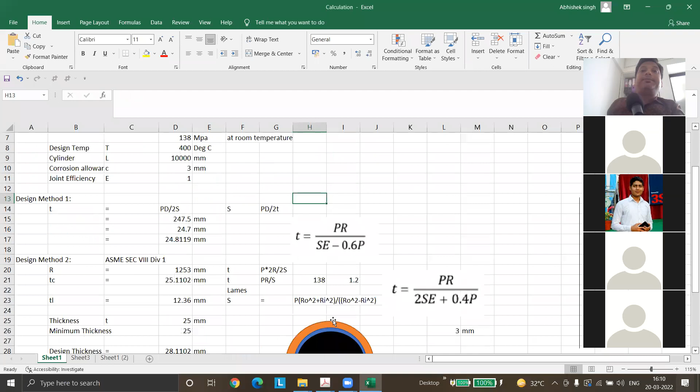Okay, this is the calculation we had last time. So if we want to draw that, consider this as a sphere. It will be along this line. And in this line also, if we see it from another view, it will all be the same.

So there's only one type of stress, but the stress generated in a spherical shell is only half the magnitude of the circumferential stress generated in a cylinder. And that is the reason if we design the vessel in a spherical shell form, we get the thickness as only half of what we have to give for a cylindrical one. Does that make sense, guys? Yes, sir.

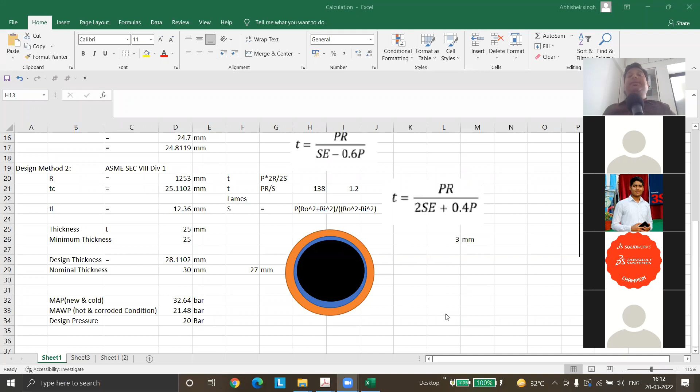Great. So now you might be thinking, then why not always go for a spherical shell rather than a cylindrical one? What do you think, which type of vessel is generally used, cylindrical or spherical? If you've visited any plant, what type have you seen? Cylindrical. So why is that, when designing, you find cylindrical more economical even though the thickness for spherical is almost half?

Then why don't we go for spherical? Construction is simpler in case of cylindrical. Correct. And who responded? Arshad, Harsha? Very good.

Exactly the right point, because the construction of a spherical shell is really challenging. It's really difficult, and then for support you have to provide a leg kind of support, which is also only a point support. So it becomes critical, and that is the reason it's less in use.

But still, if you have a very high pressurized fluid, like LPG storage, it has to be stored at very high pressure. So for very high pressure components, it still makes sense to provide a spherical shell. So many times you will see that. Once you see a spherical shell, you should remember that the pressure is definitely going to be higher in that.

That is the reason they might have gone with spherical shell. And whatever cost you save in material, that is a huge cost, sometimes more than the construction cost. So finally that economics works out in favor of the spherical shell.

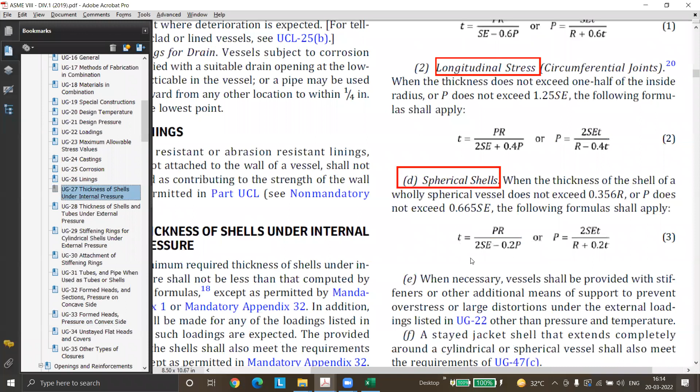Last time we calculated circumferential stress for a cylindrical shell. So this we did, and this was given to you as homework. Very simple formula - if you calculate, do you want to do it now?

You guys want to do it now if you have not done it? You want to calculate the thickness, or should we go to the next section? Whatever you say. No sir, please calculate it. You want to calculate it?

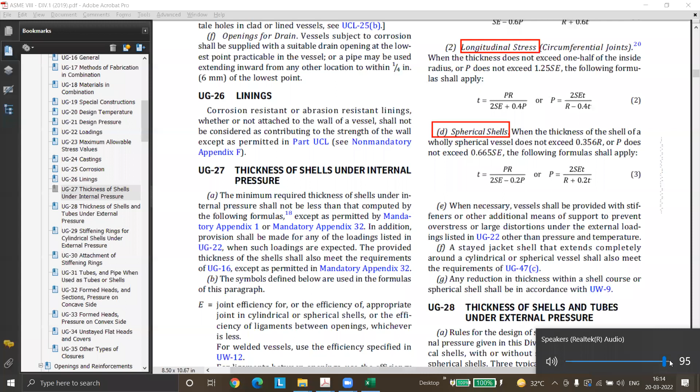Okay, let us calculate. It's better to spend 5 minutes, because once you calculate it, it will start making more sense to you. So you have to do it at least one time. Try to do it. Let us do that, let us try to calculate.

So what we'll do is copy paste the formula here. I'll just take a snapshot of it, we'll paste it here. So now what we are going to do is calculate the thickness for a spherical shell.

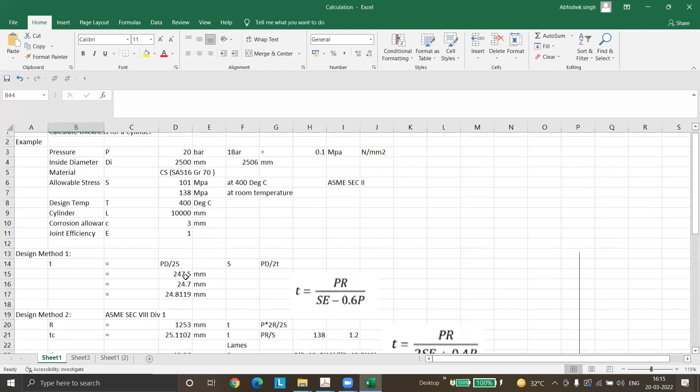Because if in operation they feel 20 bar pressure is going to be there, they will give you 1.2 times, 1.3 times higher pressure, because in the process sometimes it also needs some tolerance, so they want to keep it higher. We don't want to exceed the design pressure. So your question is very valid.

So if nothing has been said to you and it's given as a pressure like 20 bar, first of all you need to ask whether it's 20 bar in absolute or in gauge terms. You should ask that - if it is in gauge terms, that means the external pressure has already been subtracted.

Making sense? If sir gives this input in absolute terms, then you will be designing your pressure vessel for 19 bar - 20 minus 1, which is there for the external pressure trying to oppose it, which is always going to be there. So 20 minus 1, we have to design only for 19.

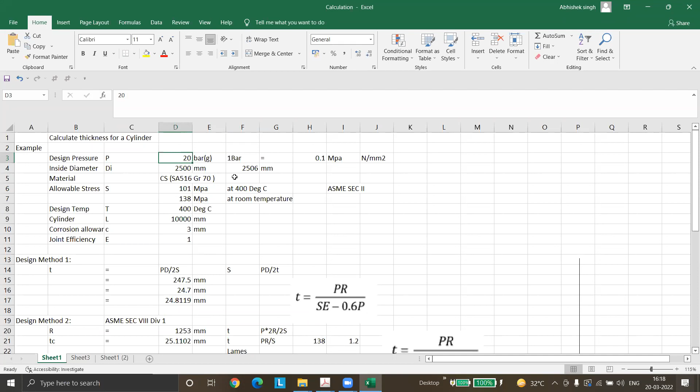So now let us do that again for spherical. What was our pressure? It's 2 MPa - 20 bar gauge means 2 MPa, right? What is the radius? We'll take the same radius which we took for the cylindrical shell - this is the diameter, so radius will be half of that. We'll take a spherical shell with radius of 1250.

There is again a corrosion allowance of 3 mm.

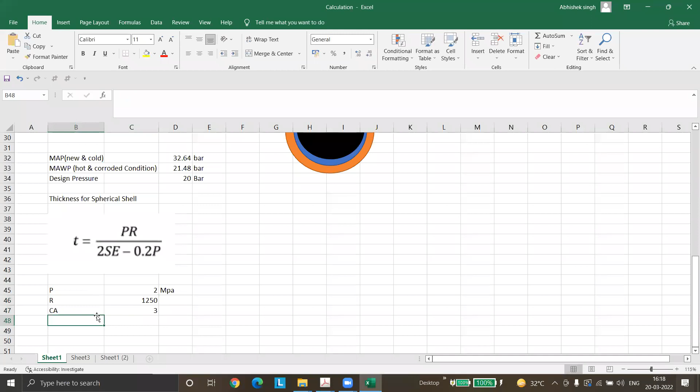All other things like allowable stress, we can just take the same, because we want to keep the temperature same. So this allowable, at 400 we have 101 MPa.

Okay, this is in mm. Efficiency wise, we want to use radius 1253. Sorry, radius is 1253, right? Right now we are just taking the inside radius. When we calculate in the formula, we'll take that, right?

Sorry, good point, right? So thickness now we are calculating. So we know that we always calculate the thickness for end of life, right? So for end of life we are calculating the thickness, pressure is going to be same, 2 into radius, like I think Mobasi said, right?

So we need to find the corroded radius. So corroded radius is going to be more, because once it corrodes, your radius is going to increase, right?

Any confusion in that, guys? Anyone who might have not attended, no video? We have spent a lot of time last class, right? So someone who is new might have that confusion, but if you go to that video, I think then it will start making sense to you.

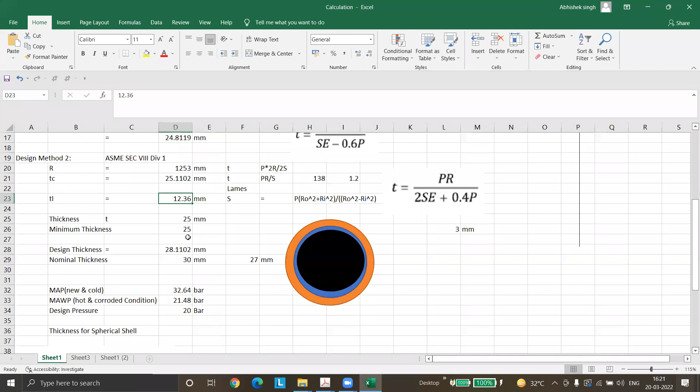So now you see it's matching with longitudinal stress thickness because of longitudinal stress. So that is the reason we say that the stresses in spherical shell are longitudinal in nature.

But actually the name itself does not make sense because there is no longitudinal in a spherical shell. But it does not matter, there is only one stress and it has half of the circumferential stress which is there in the cylinder. So the thickness also is half.

Making sense now? So this is the corroded thickness. I cannot take that and design. I'll have to add the corrosion allowance. So my minimum design thickness,

I'll say that TD will be this plus corrosion allowance, right? I need to take this.

So if this is the minimum thickness required for design, which plate thickness will you select? What will be it, sir? 18? Okay, why not 16? Now we are talking about the nominal thickness.

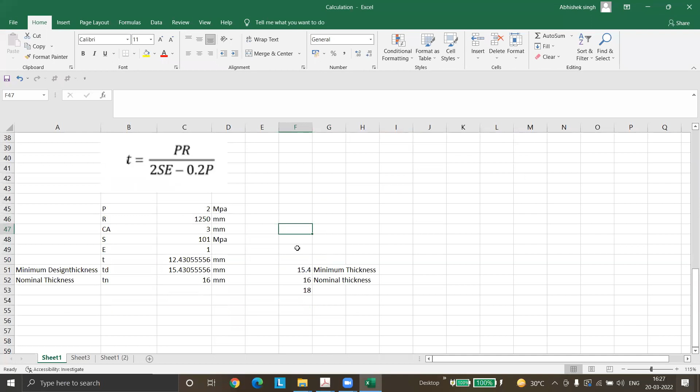Do you want to see it now, or are you aware and want to see it yourself? What is it? What are the petals? How do they look? Yes sir, yes sir. You can show it. Okay, let us search in Google.

Making sense now guys? Yes sir, yes sir, yes sir. So whenever you find some terminology difficult, just note it down. You can always see it. Once you see it, then it will make more sense to you, right? Then you will understand it better.

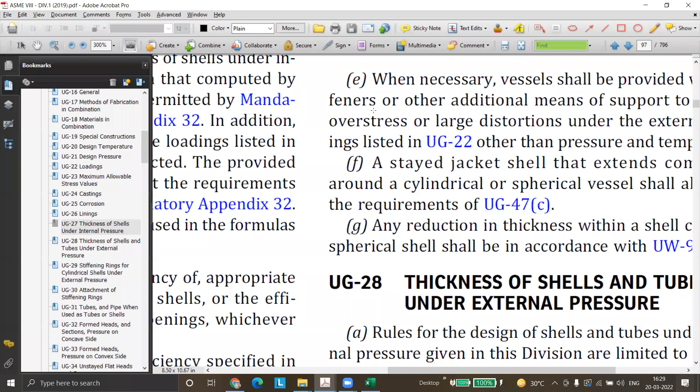Okay, so before we go to thickness calculation for different types of dish ends, like elliptical head, due to internal pressure, shall we go for the external pressure thickness calculation for a cylinder? What you want to do - you want to finish the internal pressure part and then go to external, or you want to finish the cylinder part first?

What do you want to do? So I guess the cylinder part, channels, is completed and it will be better if external is covered separately. Yes sir. Okay, so first we'll finish the internal pressure part, right? Yes sir. Okay, great.

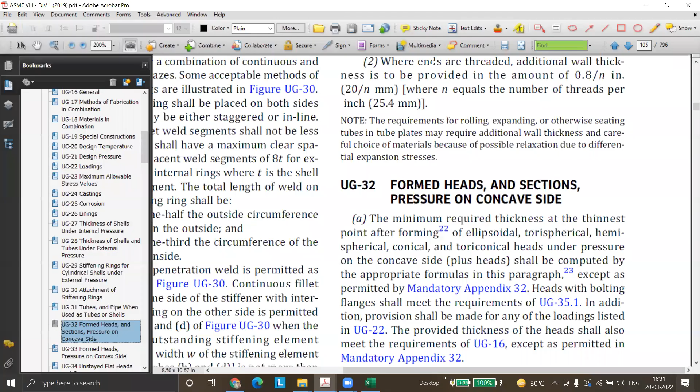So let us go to section UG-32, where we have formed heads. Now we'll just brief what we did again, so that you are in line. What we are trying to do is make a vessel, and when I say a vessel, at least these three parts will be required. If I can show you, I can just open PV Elite, and there you will see those different parts, so that will make more sense to you - instead of drawing, you can just directly see.

So for a typical vessel, the main pressure parts are the cylinders and the dishes. So if we have these three parts, first of all we need to qualify these three parts for internal pressure - that is the main pressure for which my process requires that pressure to be contained by this vessel. That is the reason why we are making this vessel first of all, so it has to contain that pressure.

So let the software open, and then we'll see those three different parts.

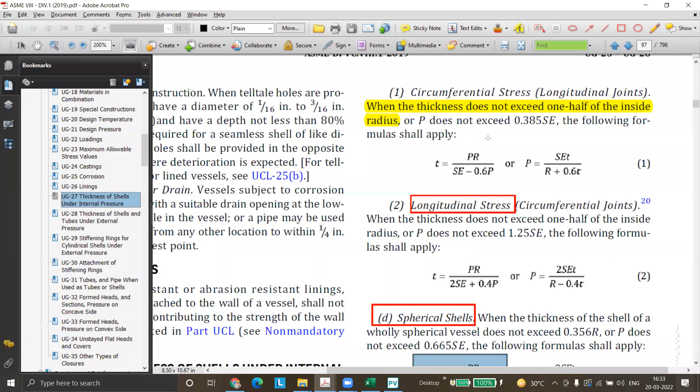When we see internal pressure for shell, the length L is not at all defined here - it doesn't appear in any of the formulas. So if I make a statement saying that length does not matter at all for internal pressure calculation, I am 100% correct. It doesn't matter whether I'm designing a 10-meter, 20-meter, or 30-meter long vessel. As long as it is internal pressure, only the radius is important, not the length. Making sense?

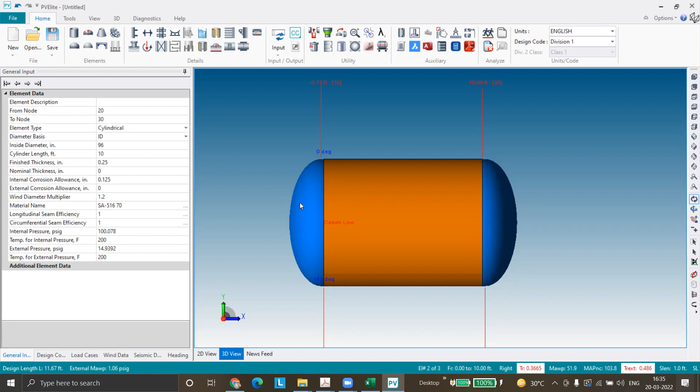Yes. So the three parts which we are trying to say - here I have selected elliptical, so this is an elliptical head. Then there is a cylindrical shell, and again I will add an elliptical head. So this is my vessel. There will be nozzles, supports too, but these are the three main elements. So what we have done till now is calculate the thickness of this cylindrical shell. Now we want to calculate the thickness of this elliptical head. That is what we want to do. Clear?

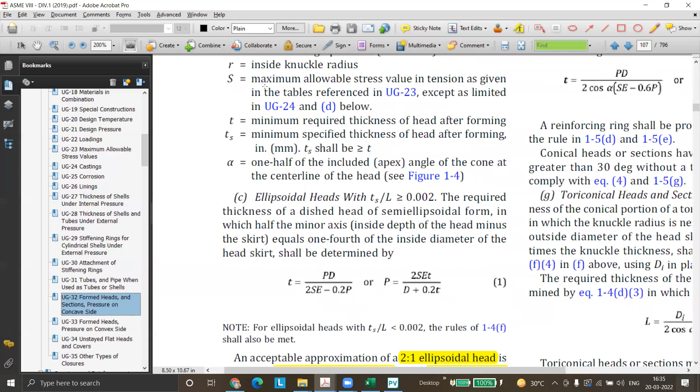So for that, we'll go to section UG-32. Before that, the definitions are there - we'll come back to the definition. So after seeing the formula, if required, we'll come back to that. This is the formula for elliptical head.

Before we go to the formula, we'd like to discuss - once I say elliptical head, what do you think? Which kind of shape is it? How many radii will it have? A typical ellipse will have how many radii? Did we discuss that last time? Yes, we discussed, Ahmed - about elliptical shapes having multiple radii, major and minor. We discussed that. No, sir.

So, like if I try to draw an ellipse - okay, this is the ellipse, right? How many radii will it have? Two, sir. Okay, I have two different answers - one is two and one is no, sir. So what does no, sir mean? How many - major or minor, sir? Okay, major and minor, so two, right? Yes, sir. Are all agreeing to that? Yes, sir, only two. Yeah, Dakshat? Yes, sir, only two radii - major and minor radius.

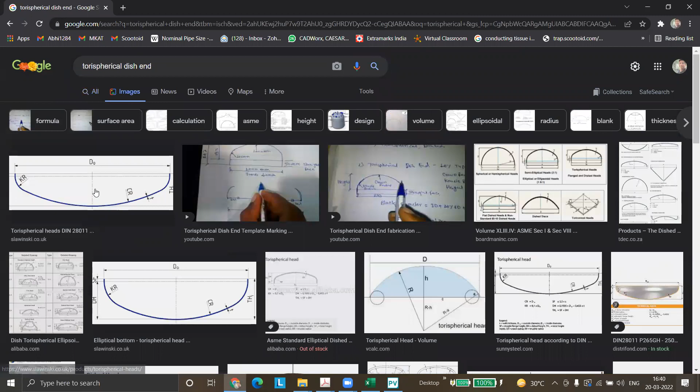Unlike elliptical head, torispherical has only two radii. These two radii are called crown, which starts from here till here, and knuckle, which is a small radius. So torispherical will have two different radii: one is crown and one is knuckle. Making sense?

Yes sir. So it looks like elliptical, but it is defined by two radii, while elliptical will require infinite radius. So torispherical fabrication and inspection becomes easier. That is the reason it is famous in fabrication. When we do actual fabrication, we prefer a head which is torispherical type, so that I have two radii by which I can define it. It will be easier for me to fabricate and also to inspect.

But then why elliptical at all are we going? We'll come back to that.

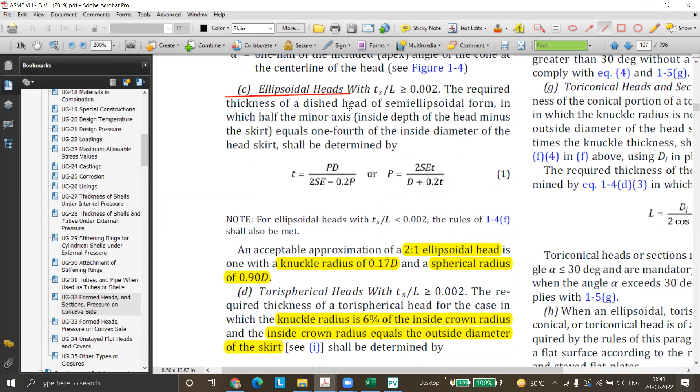So now if you see the code, there is an elliptical head. There is some formula given, but then there is a statement given here. I want you guys to just read it. If any one of you might have tried the homework, they would have seen it. So I'd like you guys to read it and we can discuss about it.

So first of all, I hope you understand what is 2 is to 1. You guys know what is 2 is to 1? No sir? So 2 is to 1 is nothing but the ratio of major to minor, major diameter divided by minor diameter, or major radius divided by minor radius. If the ratio is 2, then we call it 2 is to 1. Making sense? Because your elliptical may have lots of different ratios, right?

If the ratio is like this, then it may be 4 is to 1. If it is 1 is to 1, then what will it become? Circle, right? It is a sphere. If the ratio of major to minor is 1 is to 1, then it is a sphere. Now I start stretching it, so here I can say it's roughly in 2 is to 1 proportion. I can further stretch it, now maybe it's 4 is to 1. So it can have various proportions, isn't it?

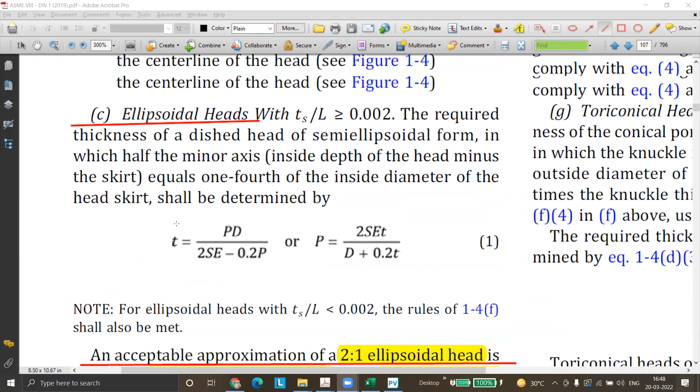Okay, making sense now guys? Yes sir. Yeah, great. So now we will come back again here.

So once we are using that d in the formula, d is what? It's the inside length of the major axis, means this one. Okay, when I say d, we are talking about this. So definitely this d, finally it has to match with the shell, isn't it? So my shell, the dish end ID and the shell ID, that should match, right?

If we see the sectional view of it, just to make it clear for you guys. Okay, we want this ID to match, isn't it? So if this ID is matching, that means my major axis for this elliptical head will be equal to the ID diameter, whatever we took, for the new condition. The same D will be there for this also. So right now we are just taking D, without corrosion allowance, as a nominal diameter. When we insert in the formula, that time we'll change it. So this is the D.

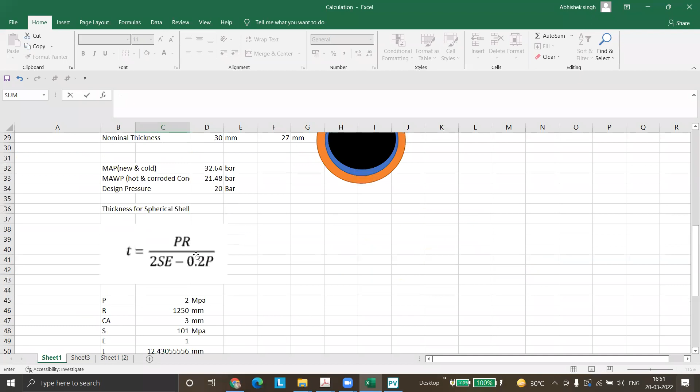P is already there. Other things are all common. Okay, so now if I calculate the thickness, let us modify it here itself so that it will be easier for us to write in the formula. So what D should I take now? If I want a corroded thickness, I'll have to include the corrosion allowance, not exclude, because I want a corroded vessel. I want to design for end of life, not only the start.

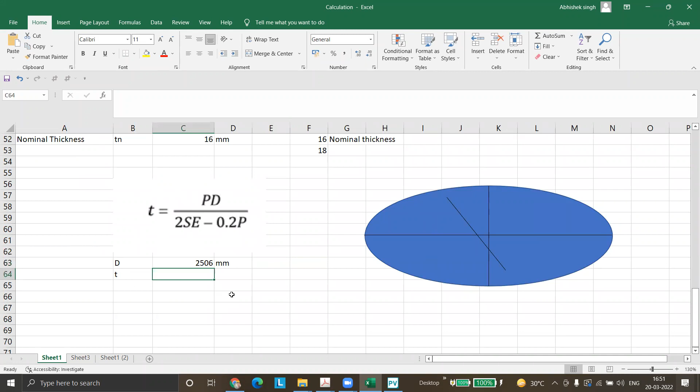Now let us make it. So T is equal to, I'll just take pressure from here: P into diameter divided by 2 times S, as we have taken here also. So again, from here I can take S, then E is anyway 1, but we'll take that as an input, minus 0.2 times P. Right, making sense?

So what finally the minimum thickness we got? 24.8. This is the minimum thickness required.

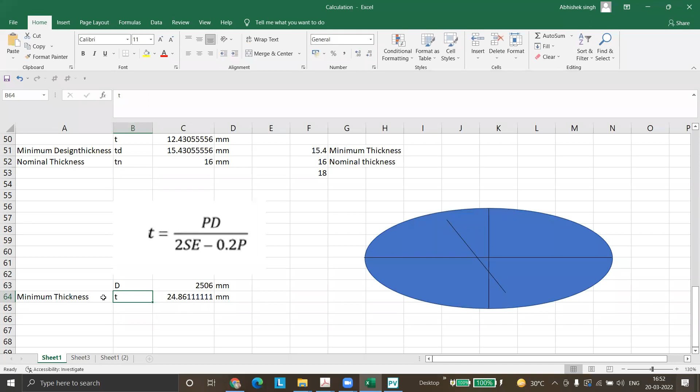But I need to provide a corrosion allowance, right? So with that minimum design thickness, I need to add the corrosion allowance. So this is my thickness. Now what should be my nominal? What should be my nominal thickness? 30.

30. See, 28 mm thickness also I can get in market. Yes sir. What you want to select? Which thickness? 30. Okay, 30, then why not 28? Sir, it is very near to 28. The value is very near. So you want to take some margin, but margin is for what? Sir, for forming processes, if anything is done.

Yeah, so now we are talking about this dish end, the forming is very important, and when we do forming, if you see the knuckle is having very sharp radius. So once you have to make a sharp radius, there that thinning happens. Fiber elongation is more. In code, fiber elongation formula is also there. So the thinning is more in knuckle because it has a sharp radius. So once I have to form the dish end, I need to take margin for the reduction of thickness. So once I take 28, I don't have any margin. So normally, how much thinning is expected? The maximum thinning is expected as 10%. That is the maximum thinning which is expected by the process. So if I say the 10% of, let us say I've started with 30, what will be 10% of 30?

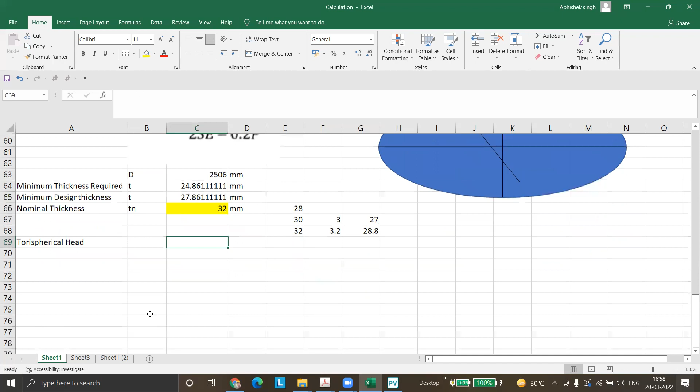Great, so now we'll go with torispherical.

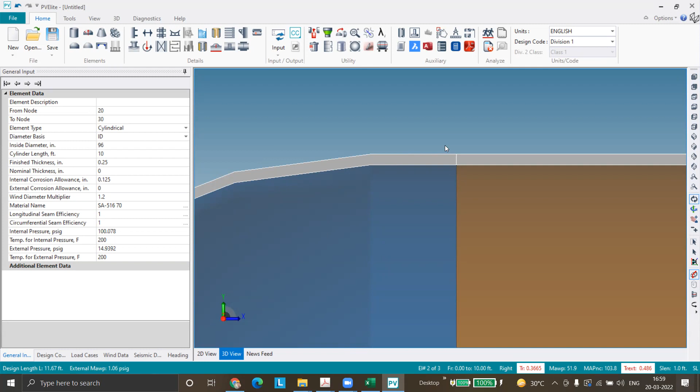Torispherical shell, you already know how torispherical is, it will have two different radiuses. But now here, like knuckle was 17% of the diameter, here your knuckle is only 6% of the crown. Now what is the crown radius then? Crown radius equals the OD of the skirt. When I say that, it means OD of this - this is the straight length of the dish end called the skirt. Making sense? So your knuckle is 6% of the crown, and your crown is equal to the OD of this dish end. Making sense? Yes, no, confusing?

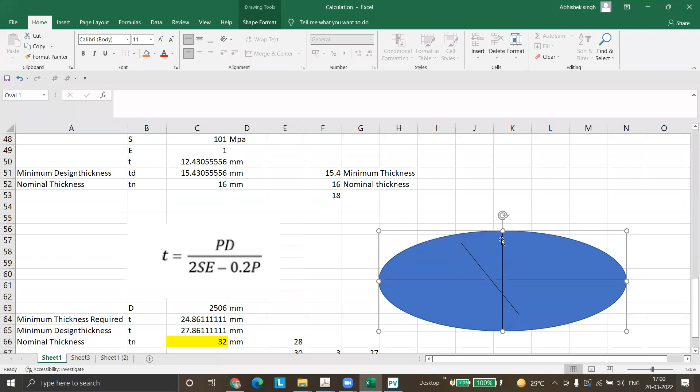So can you repeat? Yes. So as you know, for a torispherical we need two radii, right? One is crown and one is knuckle. If I have these two radii, I can draw a torispherical head. So torispherical can be of lots of different shapes, right? It can have lots of different ratios, different diameters. So ASME has defined that if I want to use this formula, it is applicable for a torispherical having knuckle radius - knuckle means this radius, the knuckle portion - as 6% of the crown. So it will be clearer once we calculate it, we are going to calculate it, so I think that will be better. So let's just calculate, it will make more sense to you. Shall we calculate?

Just a minute, I'm having a call.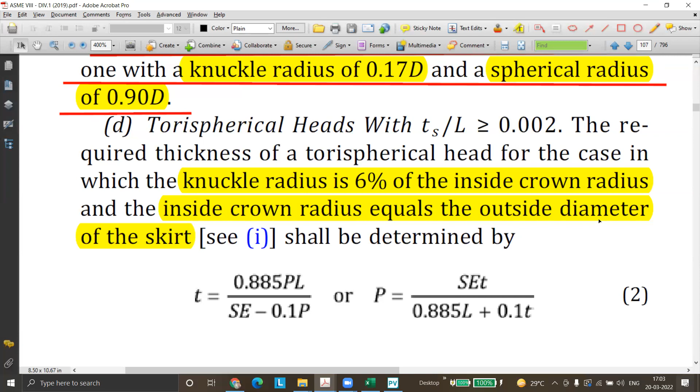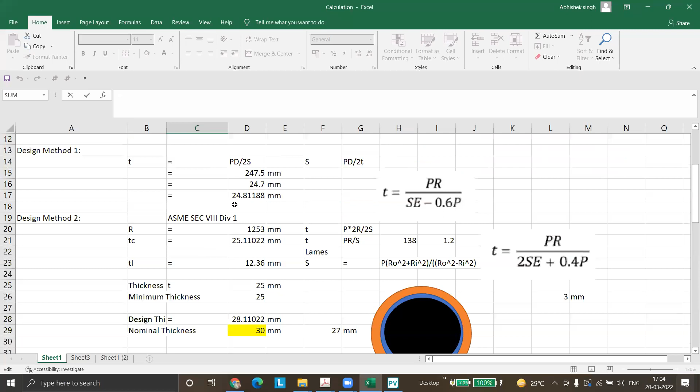So the crown radius equals the outside diameter of the skirt. So crown radius, if you see how that crown is, which word they are using for crown radius - if you go here, L is the inside spherical or crown radius. So if I take this L, how are they defining it? It's equal to the outside diameter of the skirt. How can I calculate the outside diameter? Do I have the inside diameter? Yes sir. Yeah, what is it? 2500, right? So if I add twice of thickness, then I'll get the outside diameter, right?

Yes sir, clear? It's very simple, right? I have ID, I want OD. So OD is nothing but ID plus twice the thickness, isn't it? Yes sir. Clear to everyone?

Okay, but now the problem is the thickness is what we are trying to calculate, isn't it? Then how can I add the thickness and get the OD? Making sense? See, if I have to find OD, I need thickness, but the thickness is what we are trying to calculate.

So if you want, if you're good with equations, you can use T here. Or you can take any thickness, assume like 32 mm, calculate L, and then do the iterations. If the thickness you got is 40 mm, then again you have to calculate and see how much L is changing, and then what is the final thickness. You keep doing this unless whatever you assumed and whatever final you got match, you have to do the iteration.

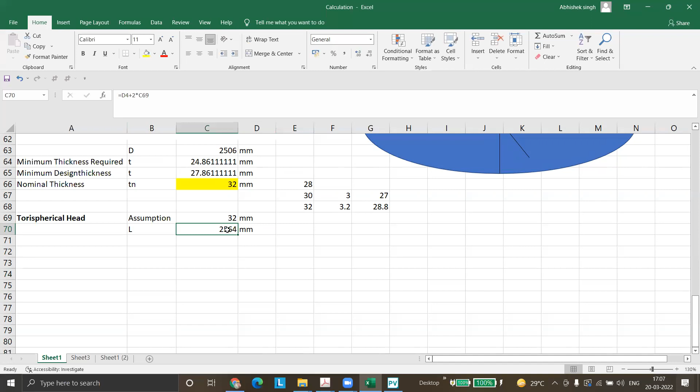Yes sir. Okay, but now this is the crown radius, so it is inside. So finally this will be my L when my crown is new. When it is corroded, it is going to increase, right?

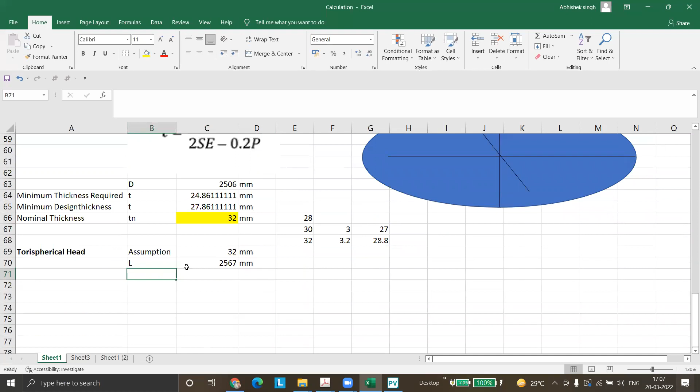So I'll have to further add the corrosion allowance here. Now I have the L value in corroded condition. I'll just copy paste the formula so that we can see and calculate here. So L value I have. Now if I have to calculate the T...

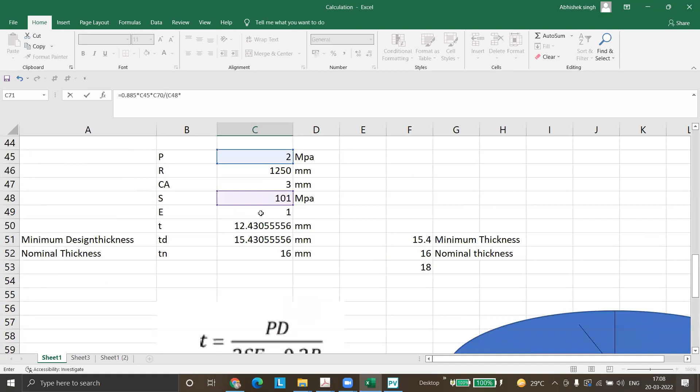Then 0.885 times pressure. You guys can also do the calculations so that if I make a mistake, you will be able to catch it. S is the allowable stress into E, minus 0.1 times again pressure.

Oh, what thickness did we get now? 45. So we started with 32, so definitely if I take 45 here, my L will be changing, and if L is changing, the thickness will change. So this thickness is not final. Now I know that roughly 45 mm I'm going to get, so I'll start with 40, then change my assumption to 45. Once I take 45, I can see that it's very close.

Let us take 45.5, very close, right? So if you want, you can take 45.54. If you want to match with two digits also, 45.56, 45.55 — I can take 45.55, it will match. So if you do this in an Excel sheet, it will be much easier for the next calculation. Now I can see it's matching. If I limit this to only two digits after decimal, it's exactly matching, right?

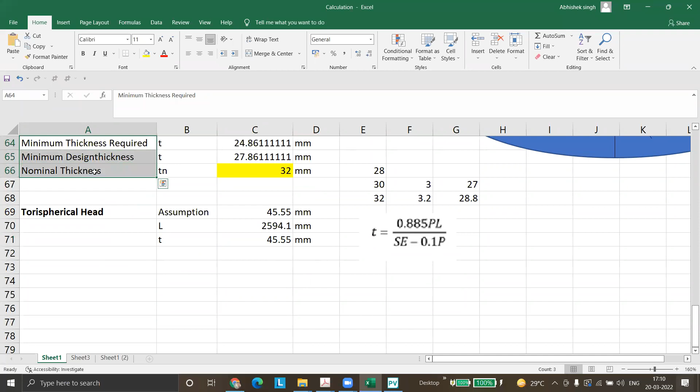So now I'm good. This is my minimum design thickness. I'll have to do these things again — this is my minimum required thickness. I need a minimum design thickness and a nominal thickness. So here I'll have to add corrosion allowance.

And then here I'll see — if I take 50 mm, then with 5 mm thinning, I'll get 45. But I need 48. So I'll have to start with 55. With 55 I'm getting what is required, so I can even take 54. This is good, so I'll take 54 mm as nominal.

Clear, guys? Any doubt? No, sir.

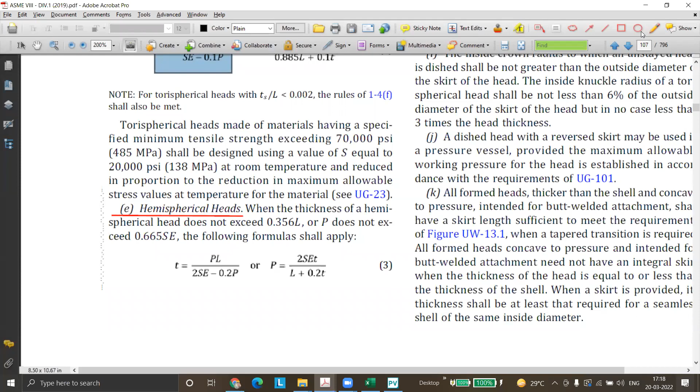Okay, great. So internal pressure, you guys are pretty clear. You can do the calculation for different types of dishes, for cylinders. Now we'll come to external pressure, right? Shall we move to external pressure now?

So we are now going to see thickness calculation. We are coming back to the shell. Now we want to check the shell thickness which we selected for internal pressure, which is 30 mm.

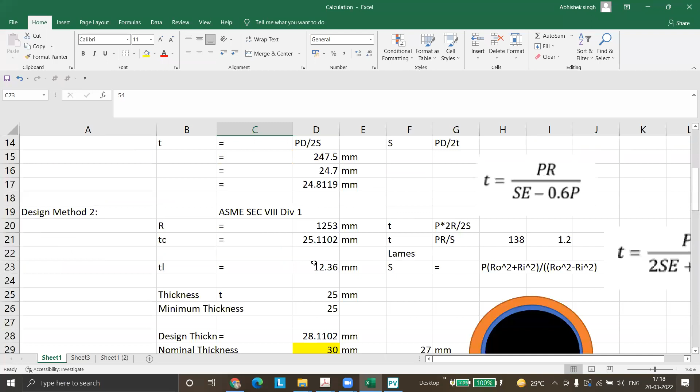Now I'll have to check whether external pressure failure is different, right? The buckling occurs. For external pressure, the shell may buckle and collapse. There is no failure by yielding of the material. The failure is because of collapse.

Collapse, if you know by the name itself, you might be feeling that it's always instantaneous. You won't be able to visualize any deformation. It will not give you any indication that it's going to fail. Suddenly it will collapse, right? So it's very dangerous. The external pressure failure is very dangerous because it's instantaneous in nature. It will not give you any indication.

So now let us check whether the thickness which we have selected for internal pressure is sufficient. Just a minute, I'll take a call and come back.

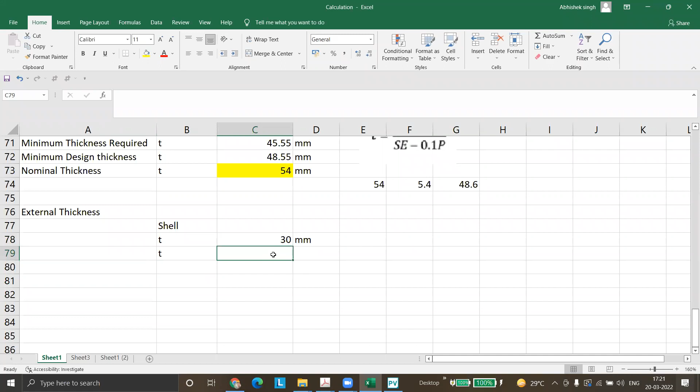Guys, are you there? Yes, sir. So shall I qualify and start with the 30 mm thickness, or do I have to qualify the end of life thickness, which is 30 minus corrosion? Which one? Which thickness do I need to qualify?

End of life thickness. End of life. Any doubt in that? You guys are thinking too much. We are doing all the calculation for end of life, right? So we need to qualify this 27. So if 27 is able to take that external pressure, then we are good to go.

Now, what is my external pressure here? We are trying to design for atmospheric. If full vacuum happens inside the vessel, then full atmospheric pressure will start acting. We have 1 bar, so we can call it 0.1 MPa pressure, which is there because of atmosphere, and it is always there.

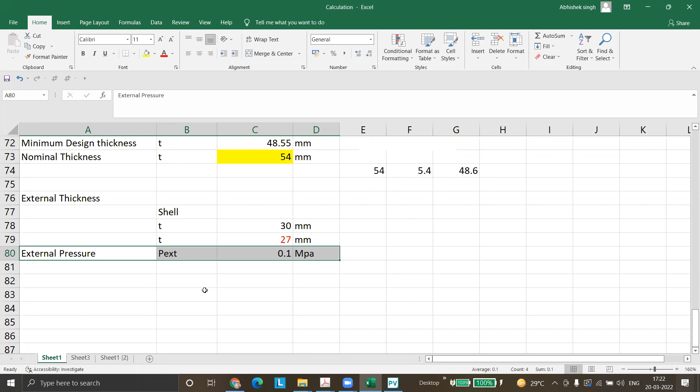But you don't have to design your cylinder for external pressure always. You have to design only when there are chances of vacuum getting created. I hope it makes sense. We have covered that in detail in the first class itself, so I hope there is no confusion in this. So P external is now 0.1 MPa.

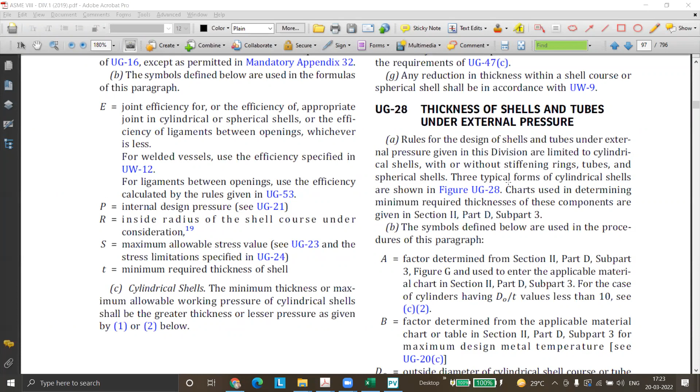Now let us start the procedure. So we are at UG-28, thickness of shells and tubes under external pressure. There are some definitions. The procedure starts from here. This is where your procedure starts.

So first of all, step 1 is to check whether my D by T ratio is greater than 10 or less than 10. Because if it's greater or equal to 10, then I can follow this procedure. If it is not, then there is a different procedure, covered in point 2. So let us check that first.

So what I need to do is see that DO divided by T. DO is the outside diameter, right? If you want to see, you can check the definition. DO is the outside diameter of the cylindrical shell course. So now I need to find out what is my outside diameter. Before calculating D naught by T, let us first calculate DO.

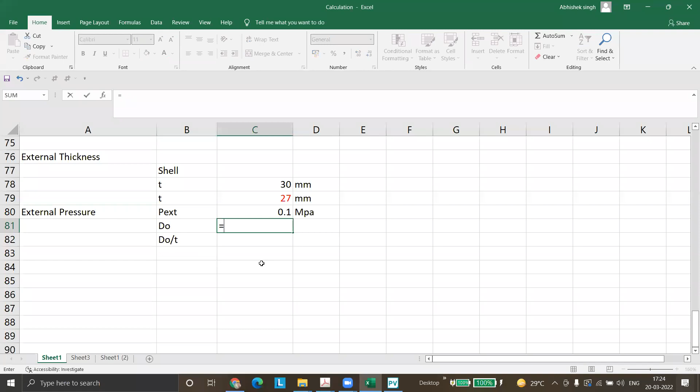What is DO? Tell me. DI plus 2T. Yes, again please - DI plus 2T. Yes, very true. So you can tell me the value also. Is this correct? 2560?

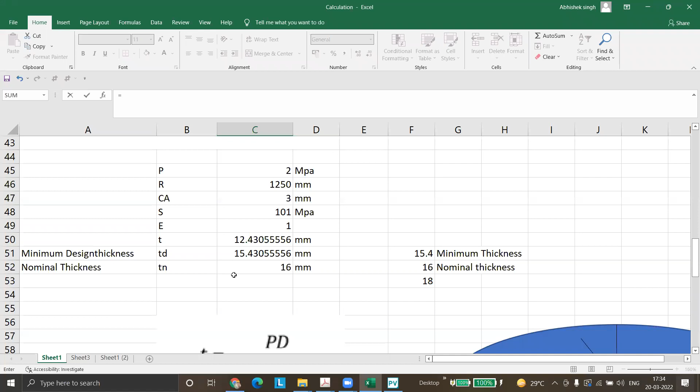So now we are at step 1. In step 1, we have to calculate one more ratio, which is L divided by D naught. So now L is coming into the picture. This L is nothing but the length of the cylinder. Right now we are only focused on this shell, so the L we are taking is the shell length. Once we calculate for the full vessel, it will be different. We'll come back to that. My cylinder length is 10 meters, so L is 10 meters divided by D naught. This is one more ratio. Once I have this, this is your step 1.

So we started with, for external pressure you have to assume a thickness. We are assuming a thickness, right? But in our case we have already calculated the internal pressure, so we are sure that even if 20 mm is qualified for this pressure, can I take 20 mm, guys? Yes, sir. If 20 mm is qualified, can I take 20 mm for shell thickness? No, sir, because for internal pressure I know that 30 mm anyway is required. So if I take 20 mm here and it's qualified, then I'll have to again do the iteration.

I have to see what exactly is the thickness where it is going to collapse. That time we'll have to keep on reducing the thickness and finally find that value which is the thickness where it will not be able to take it. So if I want to minimize my iterations, I can just take the thickness same as what is required for my internal pressure. So assume the thickness 30, and based on that we did this calculation.

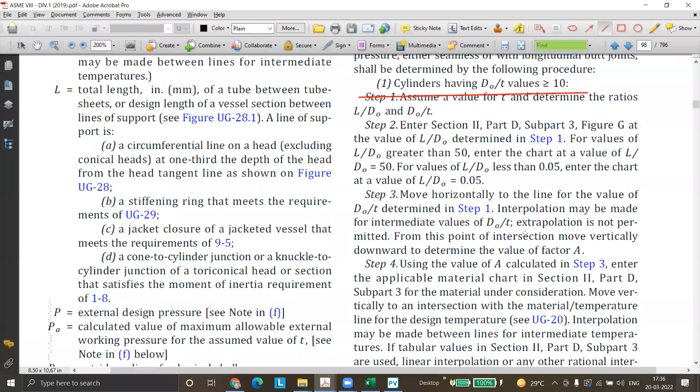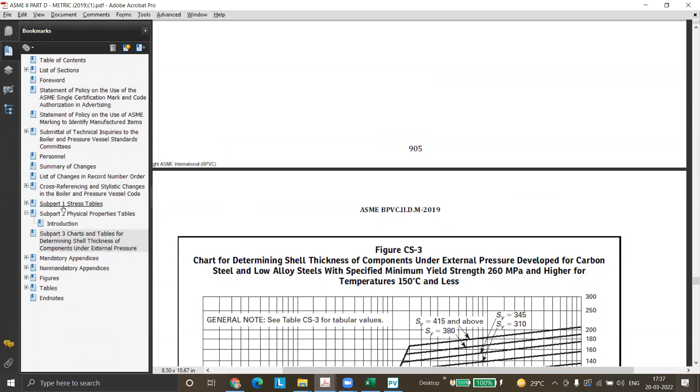Now we are at step 2. In step 2, code is saying enter in section 2 part D subpart 3. ASME section 2 part D, we know it's for material. Allowable stress we already referred for internal pressure, but allowable was in which part? Allowable stresses are given in which part? Do you remember? Subpart 1, right? If you see, I have opened section 2 part D. Subpart 1 is the stress table which we referred when we did the calculation for internal pressure, for allowable stress value. Subpart 2 is for physical properties like modulus of elasticity, density, thermal expansion coefficient. For those values I can refer subpart 2.

Subpart 3 is applicable for external pressure. So this ratio which we get by L by D naught and D naught by T, for that there is figure G. It is called a geometrical chart. Why geometrical chart? Because it all depends only upon geometry. No pressure, no temperature, nothing. Only based on geometry, because it depends only on L by D and D naught by T. Both are part of geometry. So now we can definitely enter here.

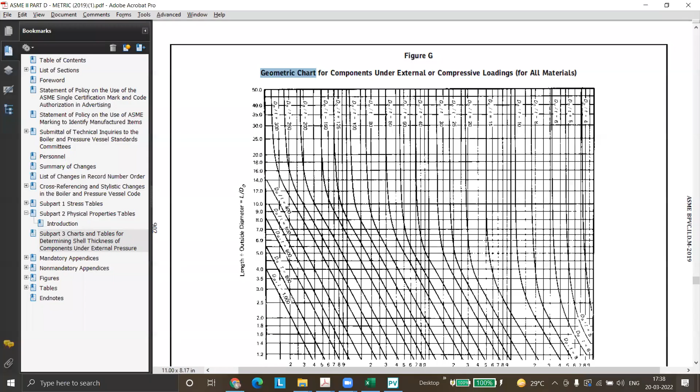So it's saying that subpart 3 figure G, which we have already opened, enter at L by D value. What is my L by D value? It's 3.9. So at 3.9 I have to enter the chart. We'll draw a line so it will be easier. 3.9, there is no exact 3.9, it will be very close to this. I can safely take it very close to 4 ratio, not 4 mm, 4 ratio. This is the line where I have to enter. What is the other line? That is D naught by T, L by D naught and then D naught by T.

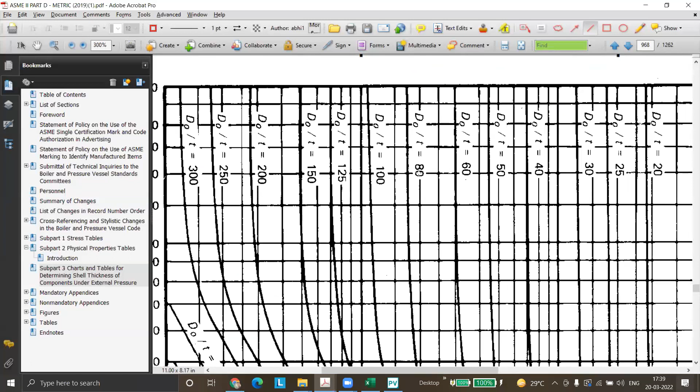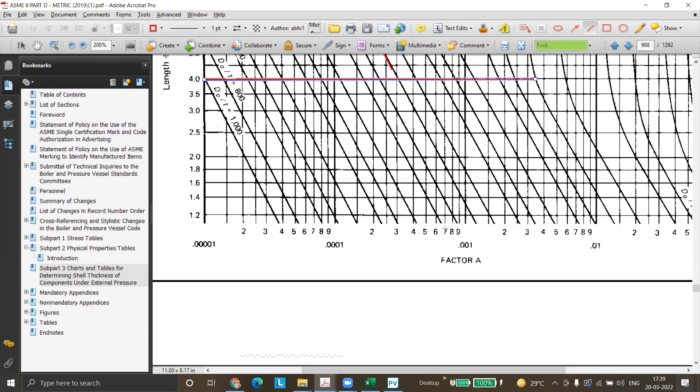Now I'll enter with the D naught. What is my D naught by T value? It's 94.8. If you see, 50, 60, 80, 100, 125, so it will be very close to this 100 value. Now I cannot draw a straight line because it's a line which is not linear. So now this is the line, you have to very closely follow that. It's 94, so I can take it maybe a little bit here. It will all be approximate. Now this is the intersection value which we got. So I'll just draw a vertical line now, and this vertical line I'll move to the intersection.

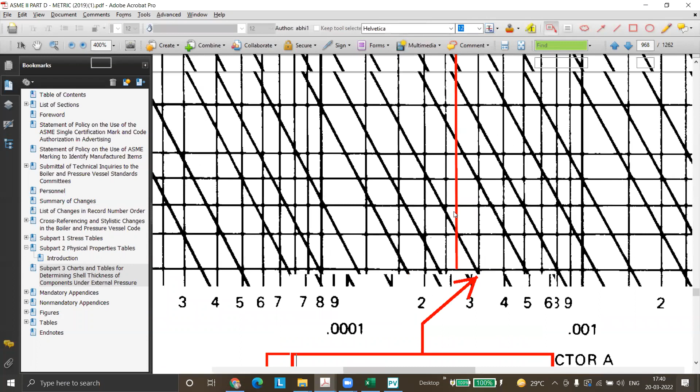So this is what we will be getting. Now can anybody read this value? See, please remember it's a geometrical graph, not a normal graph. Tell me the value. 3.3, 3.4. So directly 3.3.

We have got factor A. That factor A value we have got, that is this value, and this is from figure G.

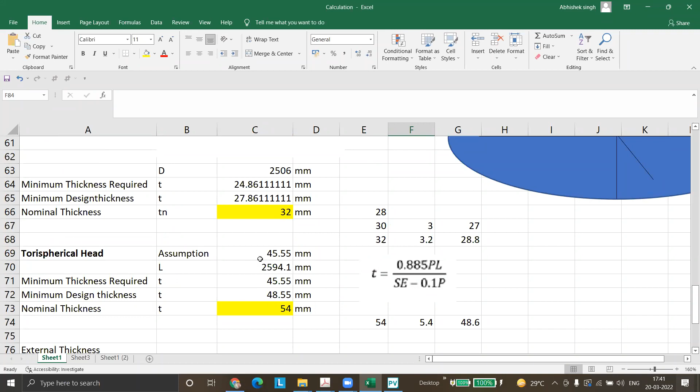You guys should know what you have to prepare for this internship. This kind of program you can make in this Excel sheet, what we are doing right now, and this can be your project for what you did in this internship.

Okay, so A value you got. Now what is next? We'll go to code. So this is all about calculating that factor A.

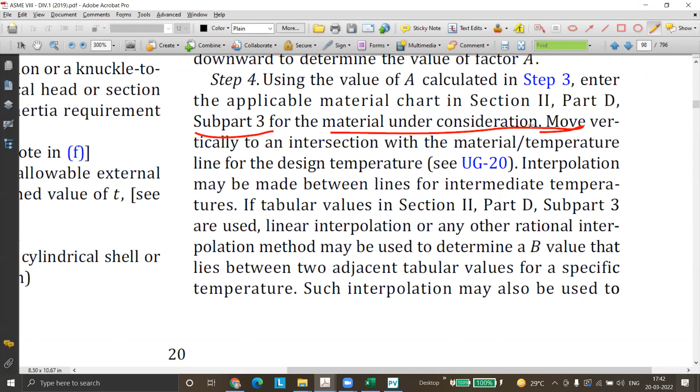Once we have that factor A, in this step 4, we have to again go to subpart 3, and then we have to go to the material under consideration, that material chart. What is this material chart?

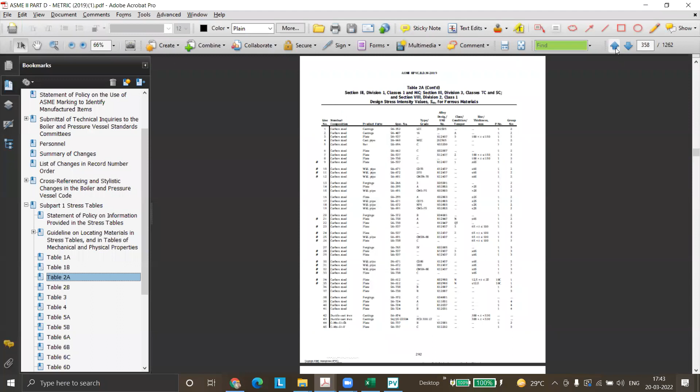So if you remember, when we are referring this stress table 1A, which is applicable for section 8 division 1, if you go to 516... okay, we are too much ahead. We have to be in carbon steel.

See, if you remember, when we are referring this carbon steel property in table 1A, if you go to page second, the same line 38, you see the chart CS2, which is your chart for external pressure calculation.

So once you have calculated that A factor from figure G, you have to go to a material chart applicable for your material that you can find from the stress table. So for this it is CS2. For 516 grade 70 it's CS2.

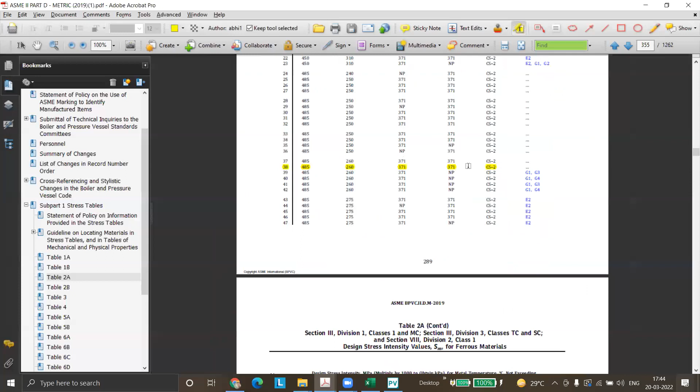So now in Section II Part D, once we are in this subpart 3, after this figure G, if you move down, there is the first figure which is CS1. We don't have to refer CS1 because we have to refer CS2. For us, this is the applicable chart. Making sense, guys? Till now? Yes, sir. Clear to everyone?

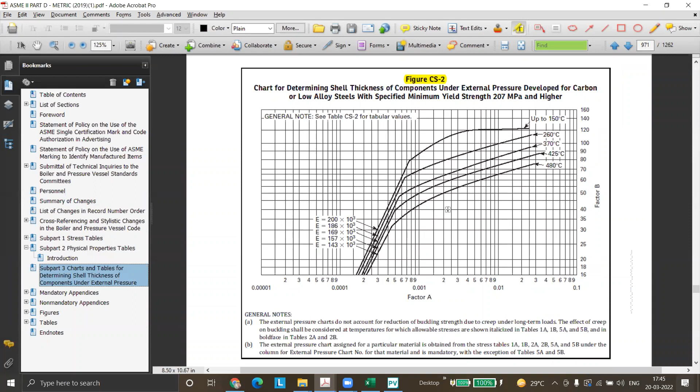Yeah. So now once I am in material chart CS2, I have to enter with the factor A which we have already calculated. What factor A value did we get? 0.0003 and 2. Roughly we were here, right?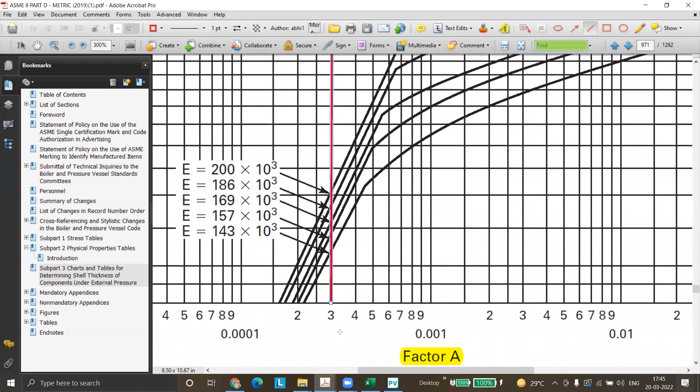So it will be difficult to draw a straight line like this. I'll just draw it here and then I'll bring it to... now it's straight, so I'll just move it like this. Now I have the factor A line. What will be my other line?

You can see that there are multiple lines given based on the temperature: 150, 260, 370, 425. What is our temperature? 400, sir. 400, right? So 400 is the design temperature.

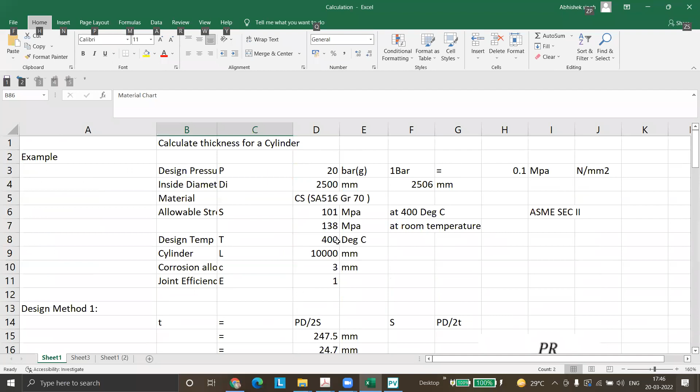So if I go again in this table, we have a line for 370 and 425. Where will my 400 line lie? I can assume it above 425, almost, no, almost in the center. So here the gap is wider, where we have to find the gap is almost negligible, does not matter. So if I just make a line like this, it will represent 400.

Then I'll draw a vertical line and move it exactly to the intersection. Okay, now this is the line which is cutting this factor B. At what value will we read this? This is 25, 30, 27.5 will be in the center. We can call it 28. Can I call it 28 MPa? So factor B... yes, sir.

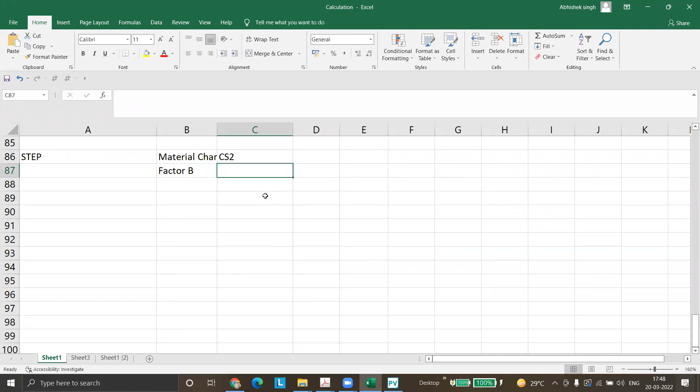So we can write that we have found the factor B value, and this factor B which we got from this chart is 28 MPa. Once I have this factor B, this is my step 3.

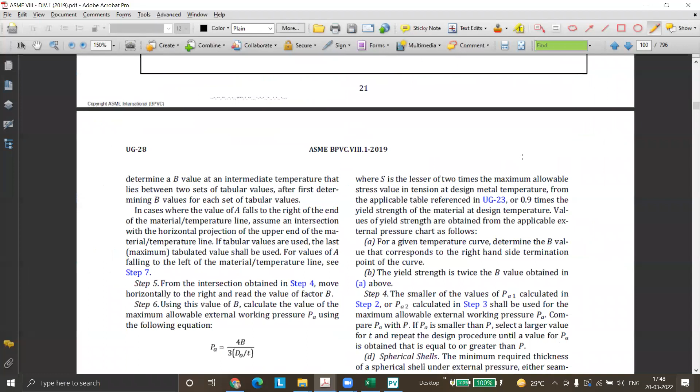In step 4, I'll again come back to the code, section 8 division 1, my design code. Once I have this factor B, I can use this equation to find out PA. What is PA? PA is the allowable pressure - how much pressure your 30mm or 27mm thick cylindrical shell will be able to take, how much external pressure.

So if I use this formula, then we'll calculate the PA value. So we have 4 times B divided by 3 times D naught by T. D naught by T ratio we have already calculated, so we'll take it from here.

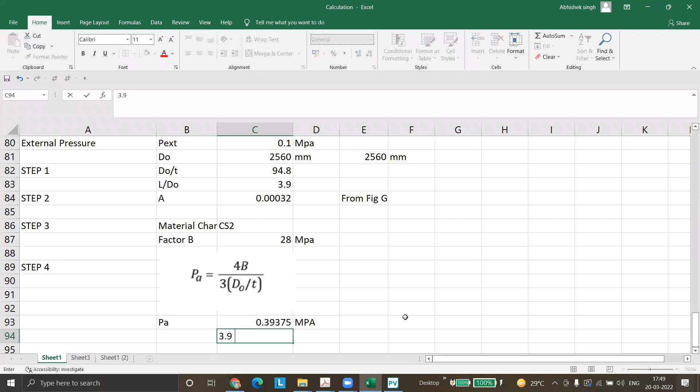So this is 0.39 MPa. If we convert that into bar, it will become 3.9 bar. What was the pressure, external pressure for which we were designing? It was only 1 bar. So now the PA value is greater than

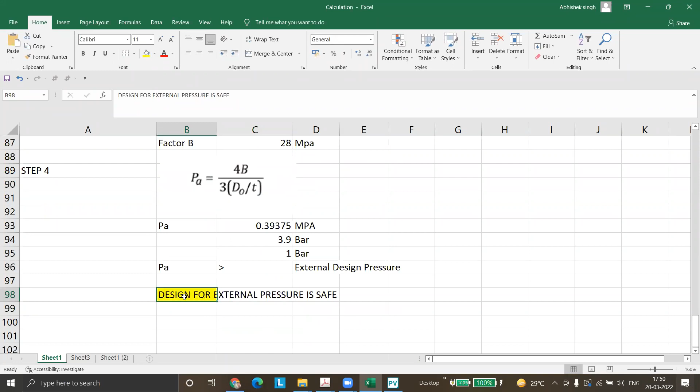my design, external design pressure. So my design for external pressure is safe. Can I say that? Yes, sir. Making sense, right? Yes, sir. Okay, so this is what is the procedure for calculating that external pressure.

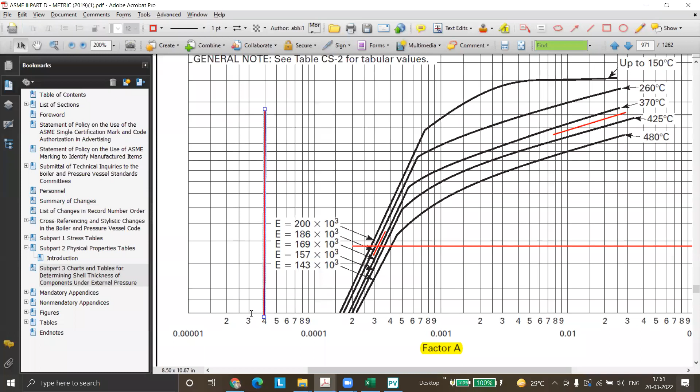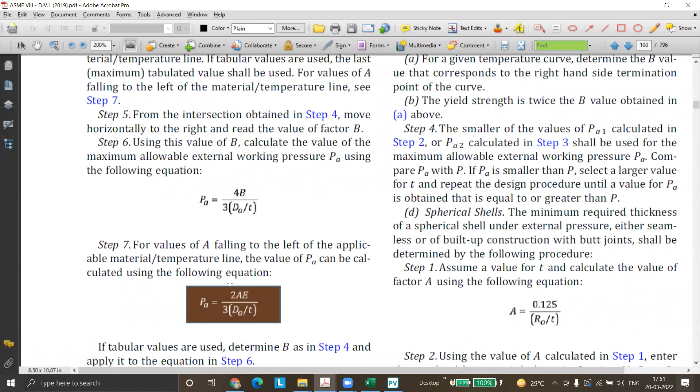So if it is completely on the left hand side, you will see that there are lots of steps which we left. If the value A falls left to the applicable material temperature line, then PA can be calculated like this - so there is no B. Directly by using that A value and modulus of elasticity value for the material at that temperature, you will be able to calculate the PA.

If it is completely on the right hand side, in the case where the value of A falls to the right, assume an intersection with the horizontal projection of the upper end of the material temperature line. That means if this is my temperature line, and this is where it's ending, so from the end I'll draw a horizontal line, and wherever it is intersecting with the vertical line which is there, this will become my value.

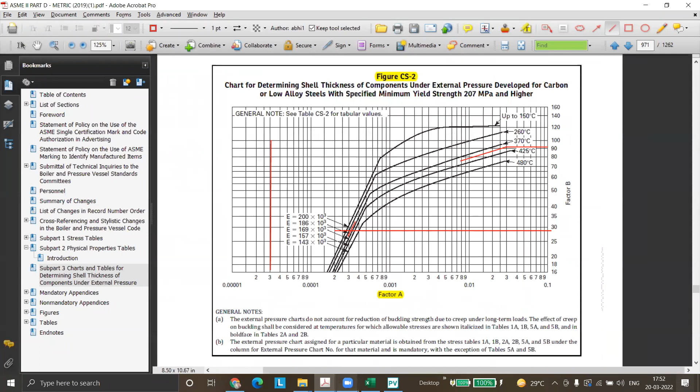Making sense? In the graph, what is the value of E? E value, yeah, looks like this is the E value, modulus of elasticity. It's not efficiency - this is the modulus of elasticity value.

So if you are getting this B value like we got in our case, we don't need that modulus of elasticity value in this formula. But if your A value falls to the left hand side, then you will need that E value because you have to use this formula. Making sense? Yes, sir. Clear, guys?

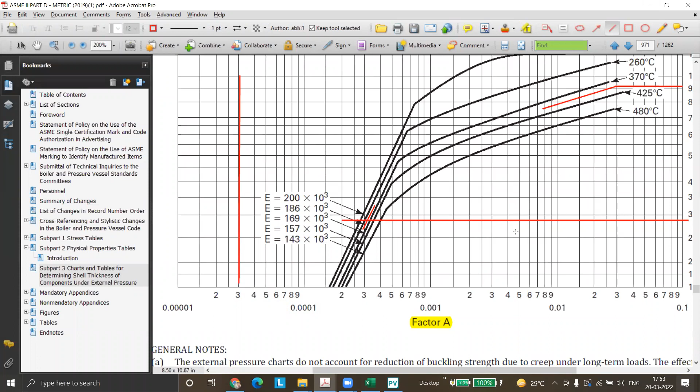So hope this external pressure - now you know, as an example, you can take different values and do some calculations so that you become perfect at doing these calculations. So any if and buts you'll be able to take. I hope today's class was interesting.

And hope you enjoyed and learned a lot. Yes, sir, yes, sir, yeah. Great, great, good guys, so it was really good. We had a good discussion also about corrosion and thicknesses after corrosion. So I hope now it will not trouble you again. Just trying to think logically, it will not create any problem for you.

Okay, so next time, try to calculate - one exercise I've already given to you. You have to calculate the thickness for internal pressure for a hemispherical head, that is the first thing. Second thing is kind of optional - if you do it, that is good, and that will be to try to calculate the thickness for the dish ends for external pressure. We have calculated for the cylindrical shell, internal and external. For formed heads, we have calculated the internal pressure thickness - the external pressure is still pending, right? So if you can do that, that will be really great.